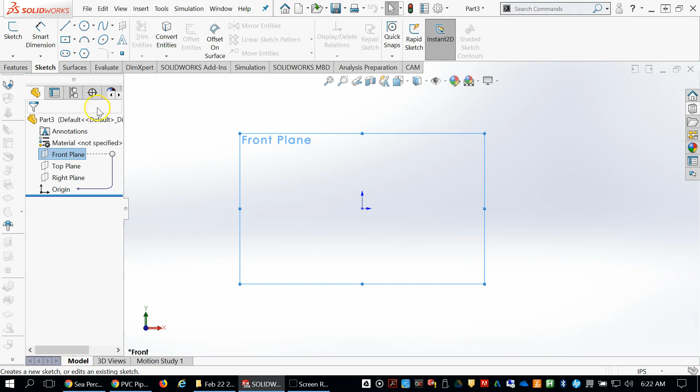Down in the lower right hand corner of your screen, make sure our units are set up in inches, pounds, seconds. On the front plane, we can select here and create a sketch.

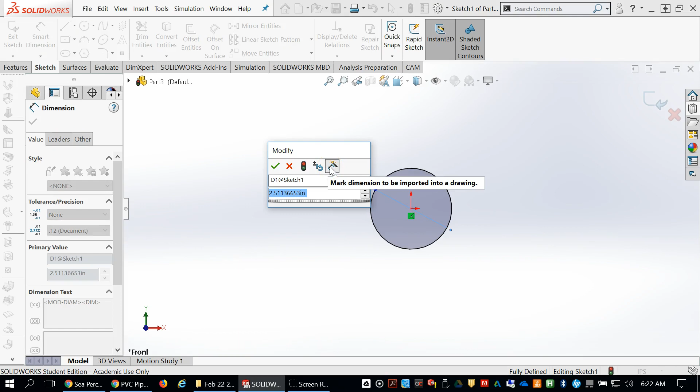Grab our dimension tool, click on the edge of the circle, and we're going to make it 0.84, which is the outside diameter of our pipe.

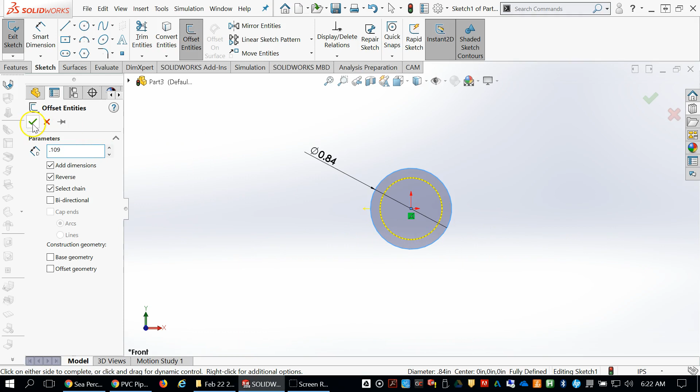We can use the Offset Entities tool and select this line. We want to go not in both directions, just towards the inside, and the wall thickness on this is 0.109. Hit OK, and we have our little donut here.

We can now exit our sketch and start making our sections of pipe. We're going to be able to do a save as and use this same file to create all of the pieces of the pipes, and then we'll go back in and put some holes in later on. So we'll start with the longest one.

We're going to click over here on Features, go to Extruded Boss. Now my sketch was selected. If yours was not, you might have to come in here, and when you go to Extruded Boss, you would have to select your sketch. The distance for the first piece is 6.5 inches.

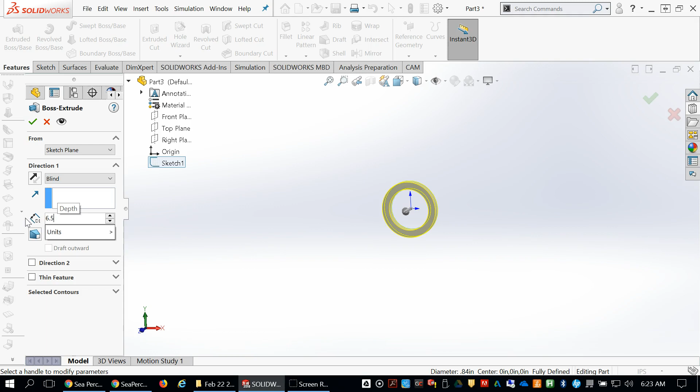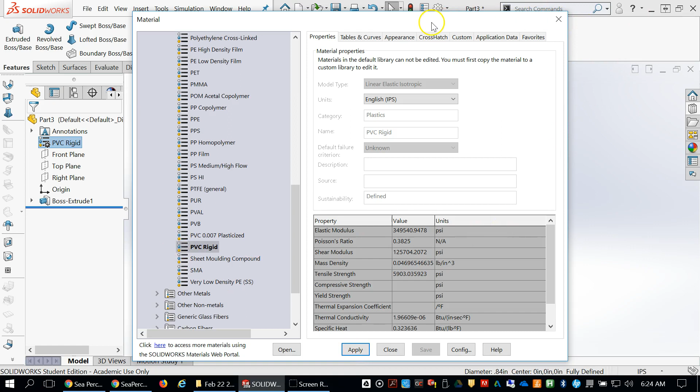And we're going to change our material. If you right click under Material and say Edit Material, close out of the steel, and we can go to Plastics, and we can pick PVC. Hit Apply. The reason we're going to select the material is at some point we're going to be covering the density of our ROV so we can figure out its buoyancy.

So we're going to be able to do some of that right here in SolidWorks. I want to save our part. Go to File, go to Save.

I've created a folder, last name, first initial, Perch. We're going to save this part as 6.5 section, 6.5 inch section, and hit Save. Oops, I don't think I was in the right folder. Try that again.

Okay, that part's done. The nice thing is we can resave this and just edit our extrusion to different lengths and take care of a bunch of other parts that we need to make. So I'm going to go through the process of doing that. We're going to get most of these done very quickly.

I'm going to go to File, go to Save As, go to the same folder. I accidentally have and delete that one if it'll let me. Alright, here we go. So we have a 6.5 inch one.

We're now going to save this one as 4 inches. Hit Save. Now before we close out here, we're going to go into the extrusion, right click and edit it. Change this to 4 inches. Hit OK. And make sure you go back to save so that we've actually saved it at that position.

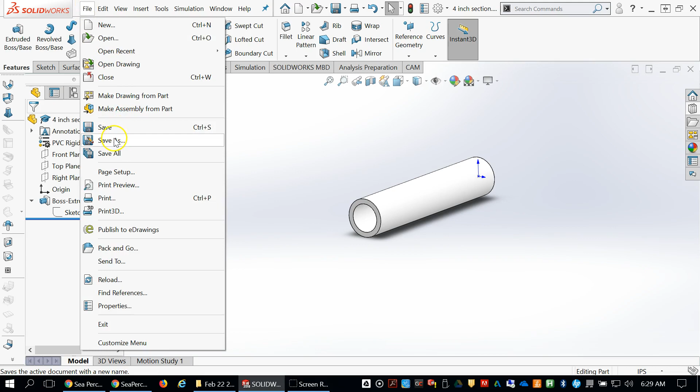Okay, we're going to go right back and save a couple more of these. So we have a 4.5 inch piece to save. I'm going to go to File, go to Save As, save it as 4.5, hit save, right click, edit feature, 4.5. Again, remember to hit save so that we've actually saved that 4.5 to the right length.

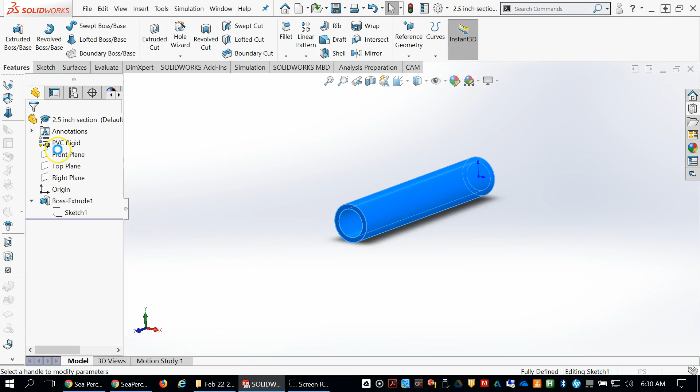Going to go back again, save as. We need a 2.5 inch piece, so I'm going to call this 2.5. Hit save, edit my extrusion. Make sure it's 2.5. Again, we need to go in and save that.

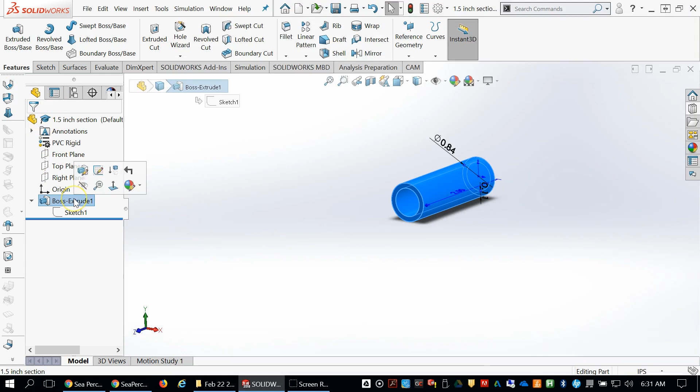Alright, we have a 1.5 inch piece to make. File, save as, 1.5. Edit our extrusion. .5. Oops. Make sure we hit the green check and we hit save, so we've kept that.

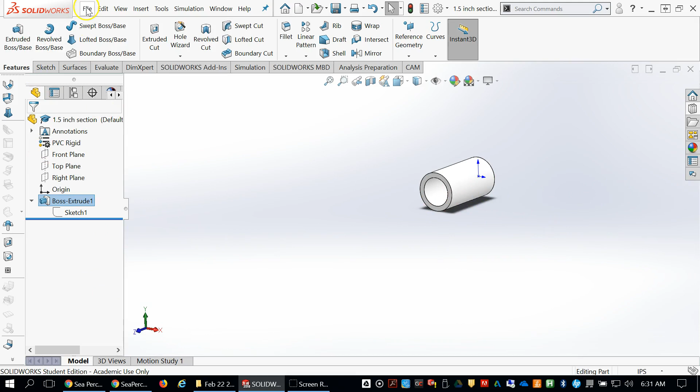And let's just take a quick peek in there. Go to save as. What do we have? We have a 1.5, a 2.5, a 4, a 4.5, and a 6.

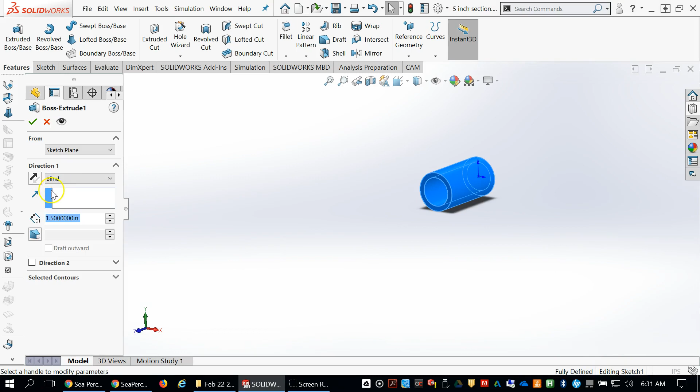We need a 5 inch section, and the 5 inch section is going to have some holes in it, so that'll be a little bit different. So we're going to save this as a 5 inch section now. Hit save. Going to re-edit this. Take it back out to 5 inches. Oops, not that much. Here we go. Hit OK. And again, make sure we hit save.

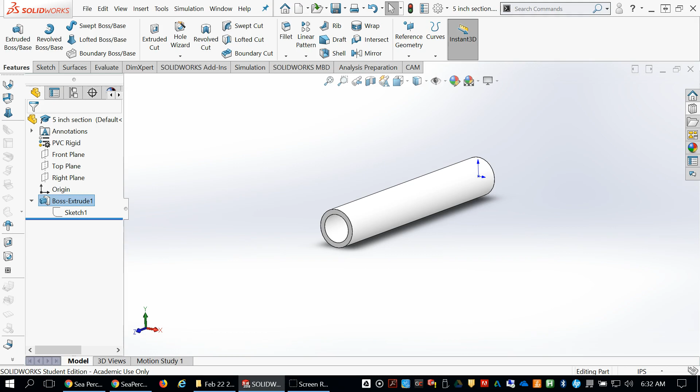And now we're going to put the holes in. Oops, we're going to have to put some holes in a 4.5 inch piece, it looks like, too. So the location of the holes, I'll show you how to do that in the next video.